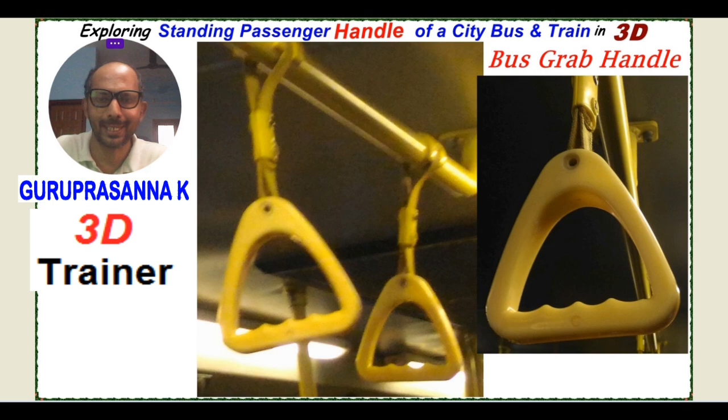Here I would like to explore this passenger handle of a city bus and train, or simply a bus grab handle, in 3D. So let's begin. This is a passenger grab pull handle which we usually see in a city bus.

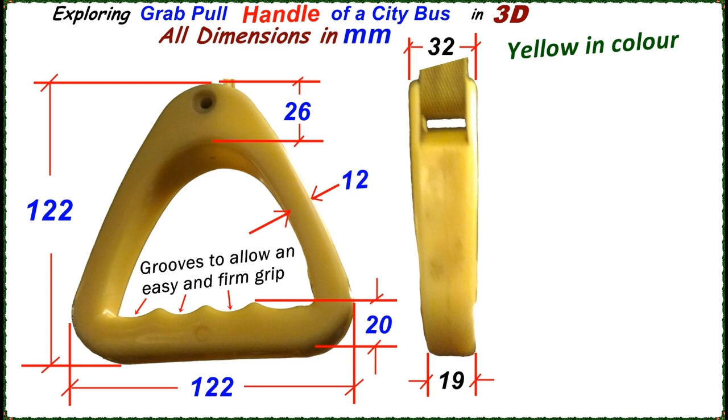Here you could see the handmade pencil drawing of the grab handle, all dimensions in millimeters. Overall sizes in mm, 122 by 122, 32 thick at top and 19 thick at bottom, and yellow in color. I assume this is of ABS plastic material and an injection molded product with an inserted steel rod at the top.

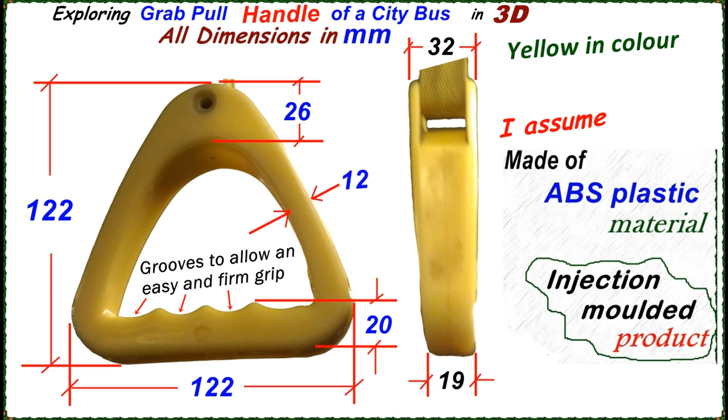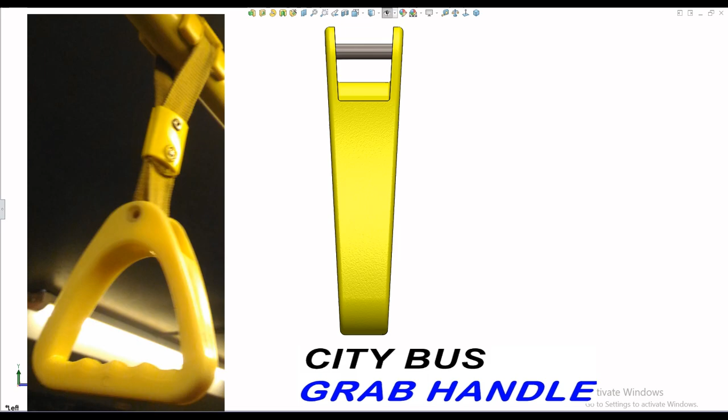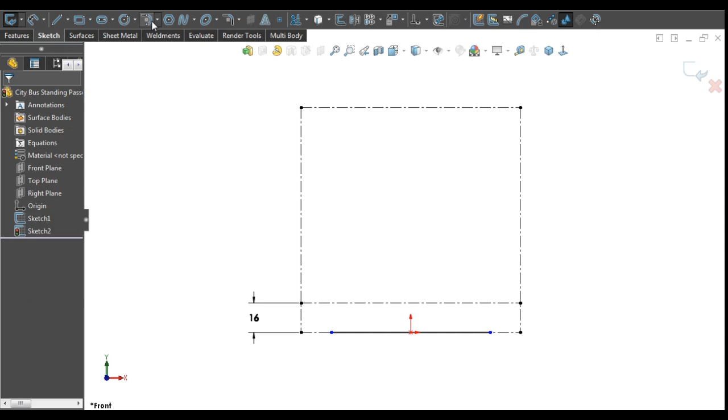First and foremost, on the front plane, let's draw a square of 122 mm as a construction sketch. Then draw a horizontal construction line at 16 mm height from bottom. Then exactly at the bottom, sketched a midpoint line and a tangent arc on the left. Then sketch mirrored the tangent arc to the right and added a dimension of radius 15.

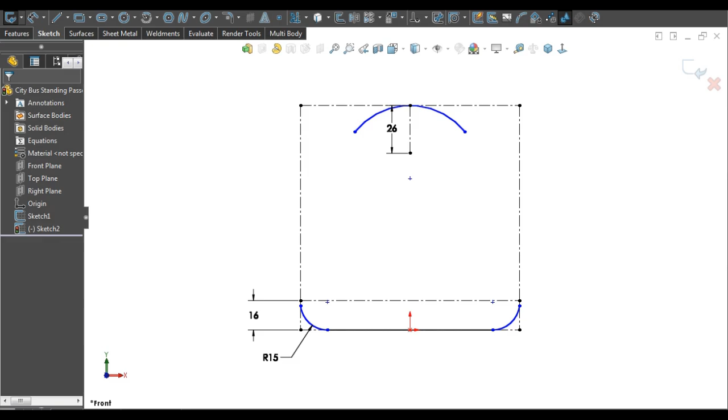Then sketched a center point arc at the top and applied tangent and midpoint relation with it. Then sketched a tangent arc on the left to connect bottom and top arcs and mirrored it to right to make a closed sketch and fully defined it. This completes the outer sketch for the handle.

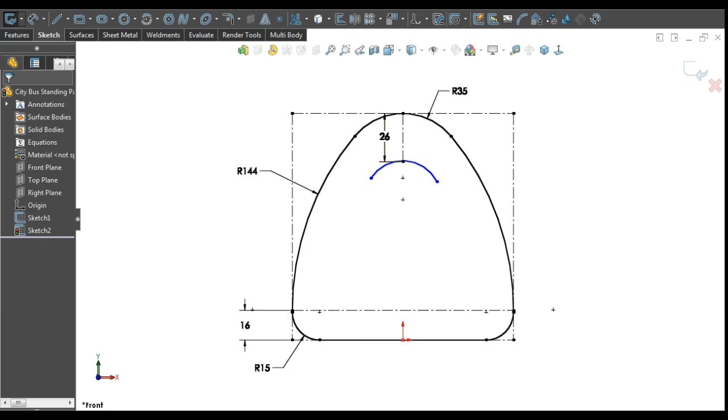Let's begin the inner sketch. Sketching a center point arc to match 26 mm vertical construction line. Then connected a tangent arc on the left and mirrored it to right. Then defined a radius of 88 mm and positioned it properly. Then added a tangent arc on the left and matched it to horizontal construction line. Then mirrored it to right and defined a radius of 8 mm.

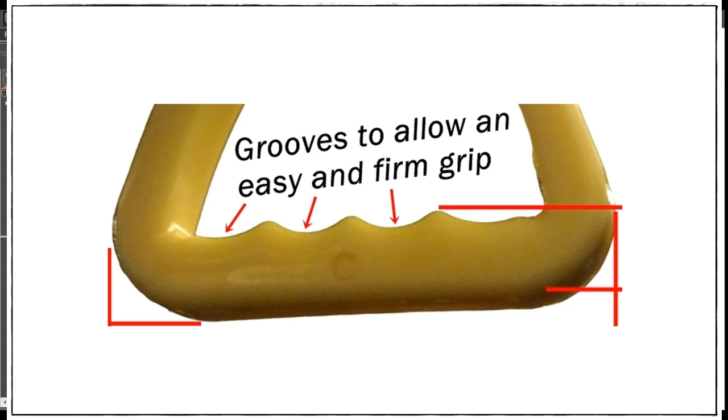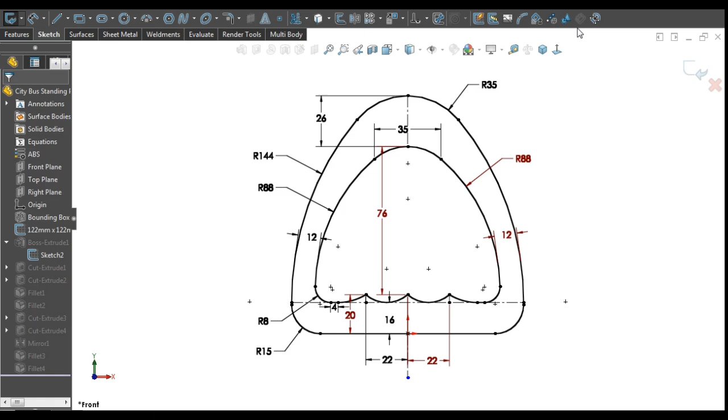Let's start sketching for finger grooves. Drawn construction sketches of 20 mm height and 22 mm on both sides. Then sketched an arc by connecting on left, then repeated it on right. Then connected tangent arcs on left and right to complete the sketches for finger grooves. And this completes two main enclosed sketches.

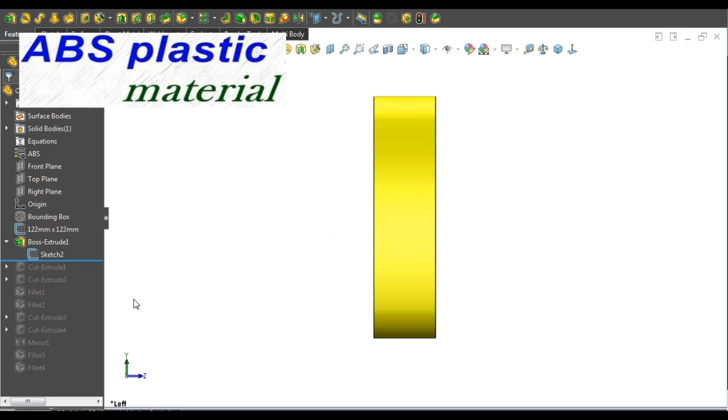Then let's form the main body of grab handle of 32 mm thick by extruding symmetrically. Main body has been applied with yellow color and ABS plastic material. Then on the right plane, drawn two closed tapered sketches symmetrically to form a bottom thickness of 19 mm.

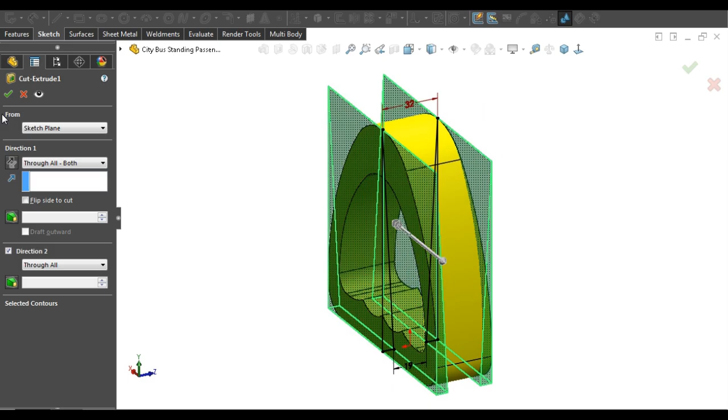Then making the tapered cut through all on both front and back to a bottom thickness of 19 with cut extrude. Then on the front plane, drawn a closed sketch at the top of handle with 4 mm down clearance. Then making cut at top symmetrically by keeping 4 mm thickness on both front and back.

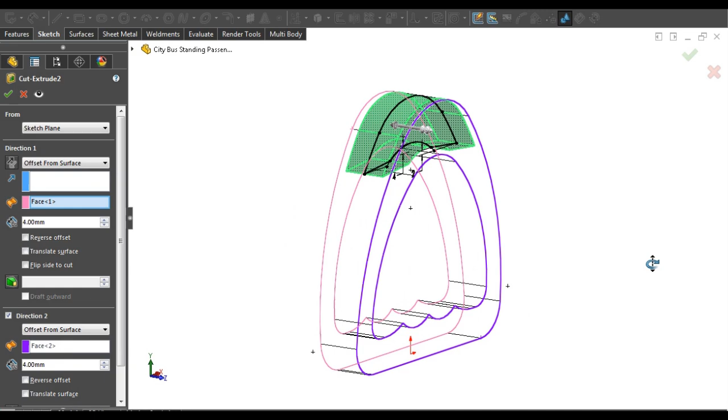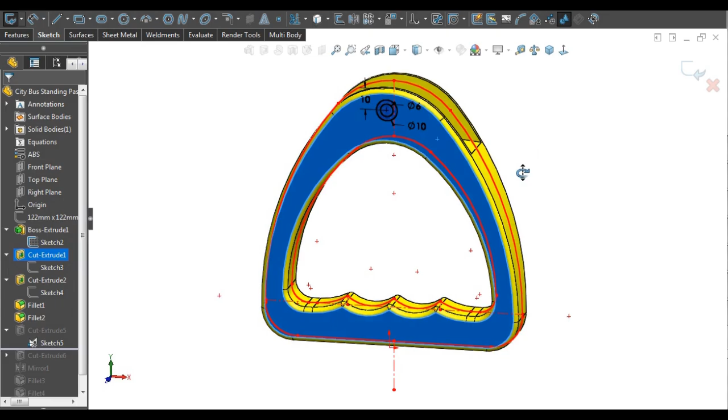Next, added radius 2 mm rounds into outer two edges with tangent propagation. Then added radius 2 mm rounds into all inner edges tangentially to get rid of sharp edges. Then on the front taper face, sketched two concentric circles of dia 10 and dia 6 at a depth of 10 from top.

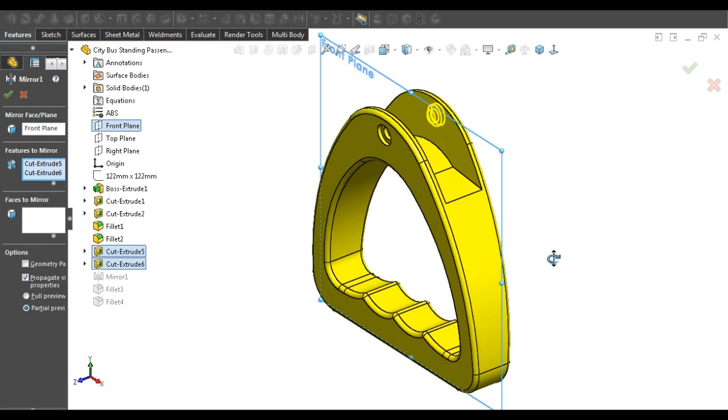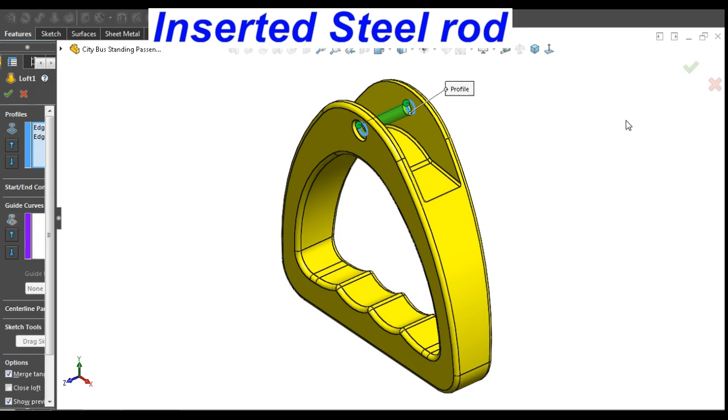Then made first counter bore hole of deep 2 mm on the front side using previously drawn concentric circles. Then duplicated the front counter bore hole to back with feature mirror command. Executed model cross-section view to verify the counter bore holes, added appropriate fillets to get rid of sharp edges, then ultimately made the inserted steel rod of dia 6 mm at the top for hanging support.

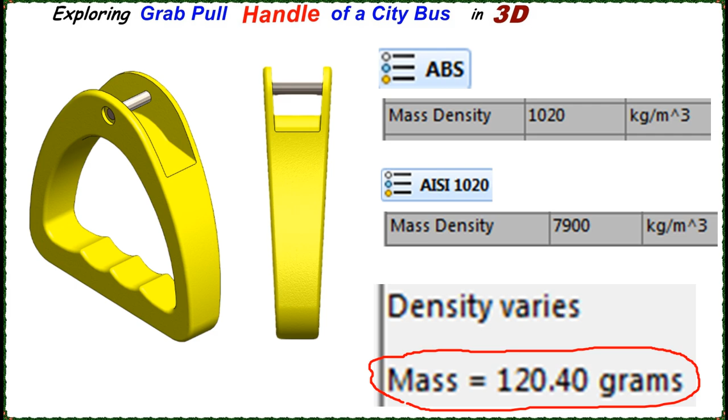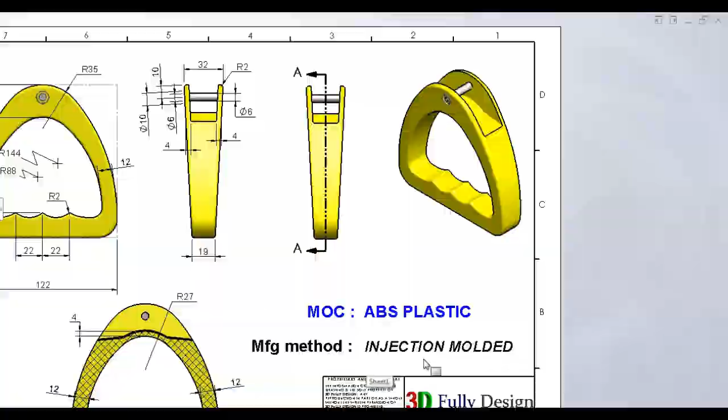Density of ABS plastic and steel are shown, so approx mass of the grab handle is 120 grams. Then the 2D detailing done from the 3D design with all details for manufacturing on a 3D Fully Design drawing template. Manufacturing is through injection molding.

Ultimately, the realistic looking city bus grab handle in 3D with tangent edges display turned off.